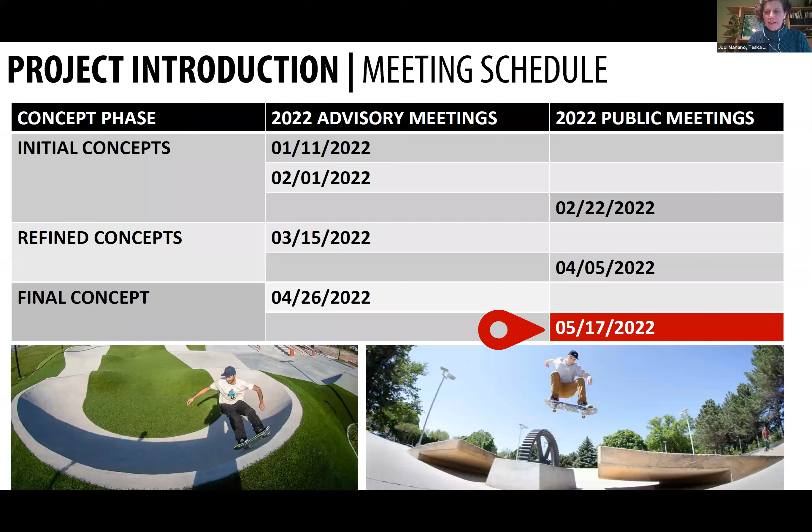So we've had a variety of meetings. We've met with the advisory group 4 times, and we've met with the public 3 times just as part of this phase. So here we are with our final concept plan at public meeting number 5.

For those that aren't familiar, the goals set forth by City Council for this project are to construct an in-ground custom concrete skate park. It's located at the eastern end of Twiggs Park, and we'll show you some maps about the location. In addition to the skate park, there would be some additional park features that came out of the engagement process. We heard a lot of information.

We know that we are looking at other things like shade structure, site furniture, lighting, portable toilets, drinking fountain. There obviously needs to be a drainage system so the skate park is skatable shortly after it rains, pathways, signage, and landscaping. There are some existing park features at Twiggs Park today, things like pathways and lighting, and those would need to be modified slightly to accommodate the new skate park.

There is an unstable and eroded embankment that runs along the North Shore Channel along the north side of the park, and that is something that will also be addressed as part of this project. There is also a goal to plan for a future restroom facility.

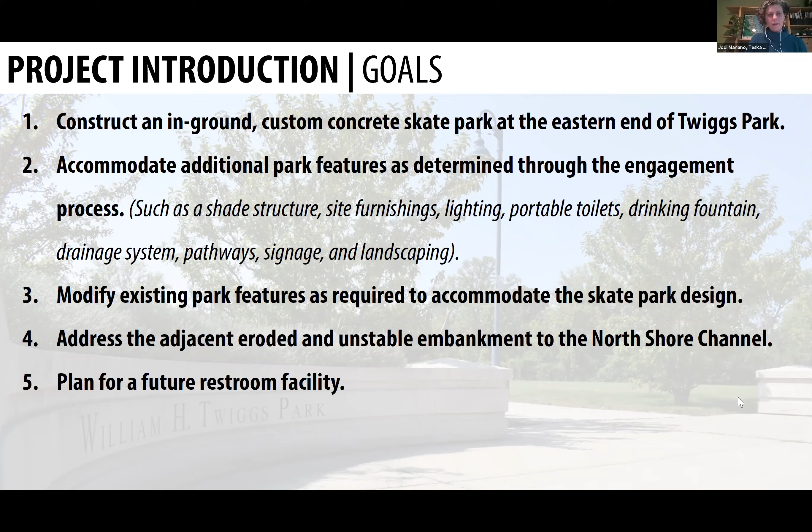So our project site is here. We are at Twiggs Park. The North Shore Channel is running along the north side of this park here, and Green Bay Road is running along here. Twiggs Park is one of many parks that's sort of this chain of green spaces that follows the North Shore Channel. It has a continuous bike path that runs through.

We also have bike facilities at the Ladd Arboretum on the other side of the channel, and we have on-street bikeways at Noyes and Ashland. So it's a great location for a park. This came out of the earlier public process, but it's visible, it's accessible, and it's part of an active series of green spaces. The proposed skate park is up here in this magenta color, located at the northeast portion of Twiggs Park.

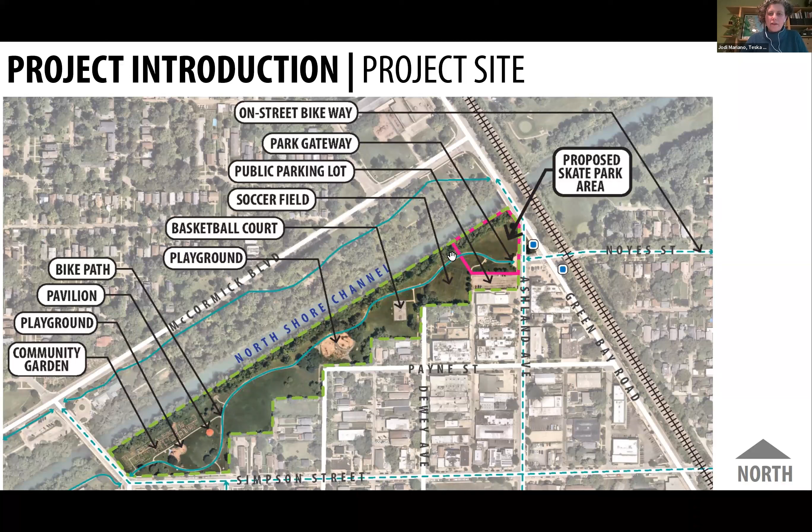Looking closer in, here again is Green Bay Road, Ashland Avenue is here, and we're looking roughly at this area within magenta. The embankment that I mentioned earlier that's in rough shape along the North Shore Channel is sloping down here - it's all of this vegetation here. As I mentioned, it's in rough shape, kind of falling apart in some places.

We've got invasive species to address, so that is something that we're looking at as part of this project. We have a very large water line that runs through here - this double dash line represents generally where the Northwest Water Commission easement is, and we can't touch anything within that zone. We are working within this orange shape here for the skate park.

We have a Gateway Plaza, that's kind of our entry, similar to the other entry plazas we see around town at the park areas. We've got our bike path through here, soccer field would stay, and then we've got a small pathway with lighting and bike racks. Things within this area would need to be modified to accommodate the skate park.

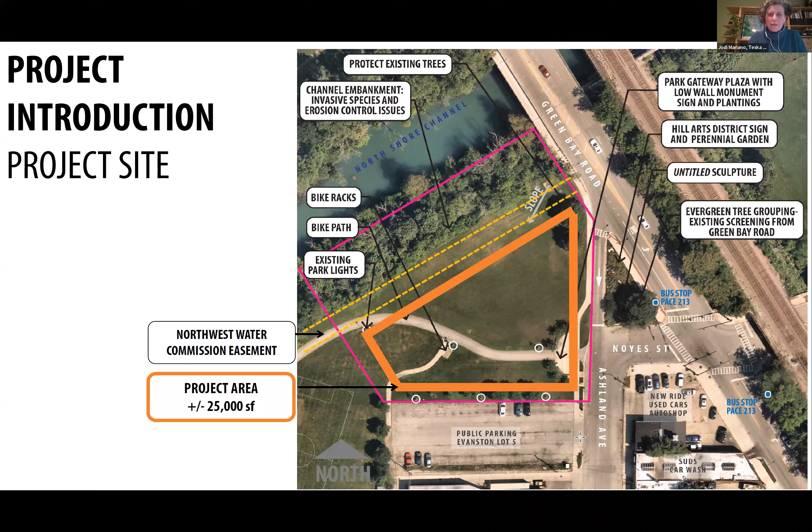So what we heard during the last public meeting in April - we asked folks to rank some of their preferences when we were looking at 2 different concepts. Overwhelmingly, I would say throughout most of the project and the public meetings, the public voted very similarly to the way the advisory group voted on things, so we had a lot of continuity that way.

Folks looked at 2 different bowl concepts: one that was an integrated bowl, kind of a closed bowl with a bonus area at the north, and one that was more of an open bowl with some features that got you into a shallow section at the south. We had overwhelming preference for C1, the closed bowl, and that's what you'll see this evening - Vince will walk us through it.

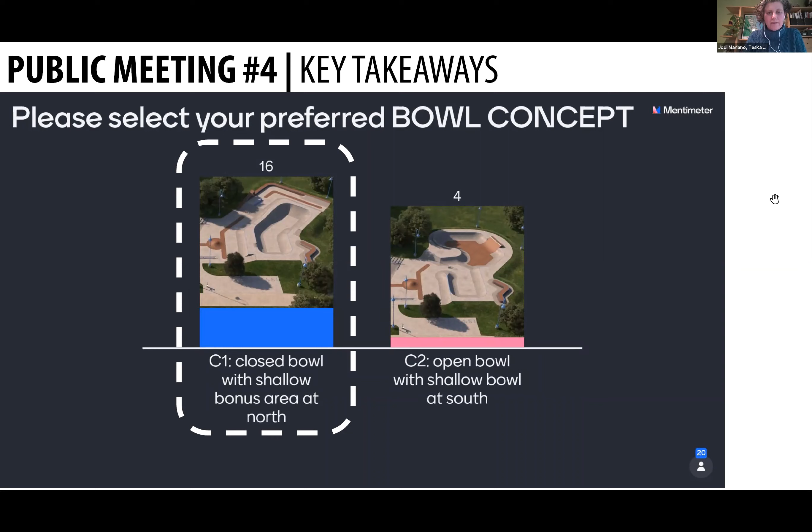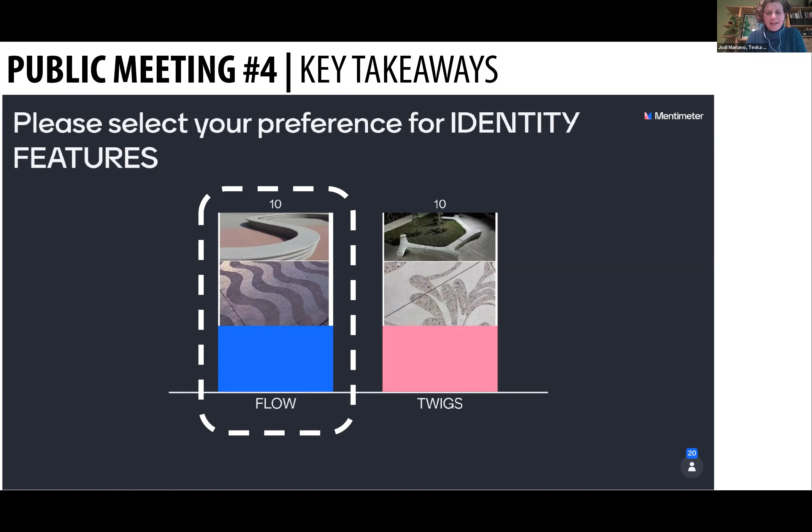We asked folks to rank two different identity features, one that represented flow and one that represented twigs, and we were at a tie. Similarly, the advisory group was at a tie on these things. So we are recommending the flow concept to move forward this evening, and we'll show you more about that.

We asked about preferences for color palette, looking at the existing Hill Arts District banners for inspiration. We heard more support for the orange with blue accents. The orange would be an integrated concrete skate color in the surface, and the blue would be our accent color, used as the steel edging you'd see on things like the bowls and other skatable features.

One of the things we talked a lot about at the last public meeting is how this park is going to operate: what the lighting will do and when the park will be open. After some internal discussion, staff decided the park hours will extend from 8 o'clock in the morning until 9 o'clock in the evening. The lighting will be similar in appearance to the security lighting out there today. As part of our construction documents, we'll run photometrics and locate specific positions for each light pole to make sure we don't have dark spots and have good security lighting. The anticipation is that the park would be closed at 9 o'clock.

Some other things we heard: a request to widen the sidewalk along Green Bay Road, which is a really good comment considering we have a bike path along Ladd Arboretum, so that's something we've incorporated into the design. We also heard about cultural identity features, in addition to a plaque recognizing William H. Twiggs, to also consider other local skaters and historical folks who helped start the skating revolution in Evanston. That's something we heard a little bit about.

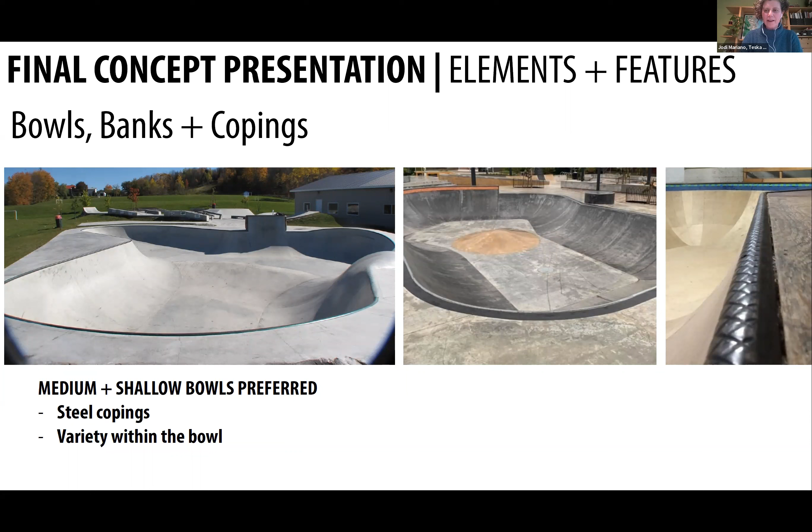Some imagery, which most of you have probably seen before at our previous meetings: our bowls will have a medium and a shallow section, as requested earlier on. They'll have steel coping like you see on the right. We'll have low and wide ledges with a grind ledge and a mani pad, and a variety of rails that Vince will talk through.

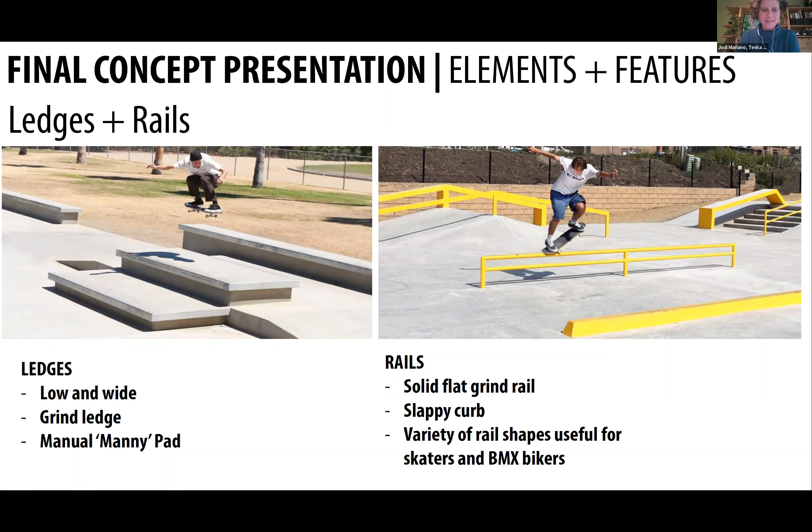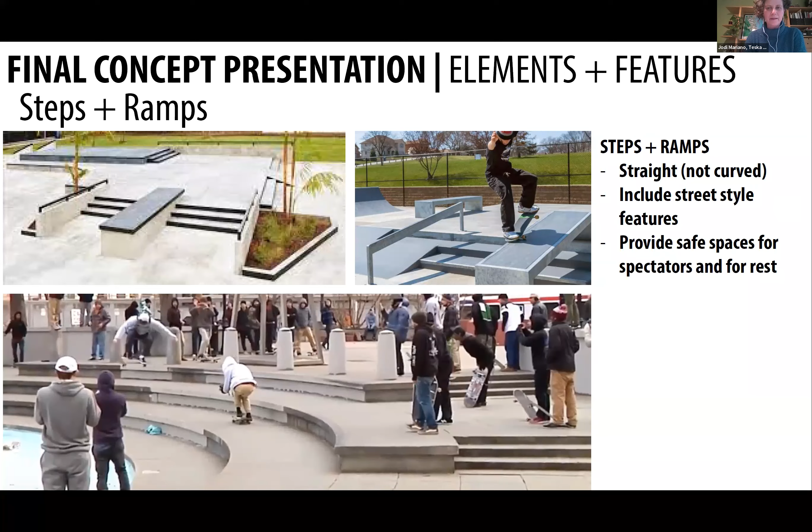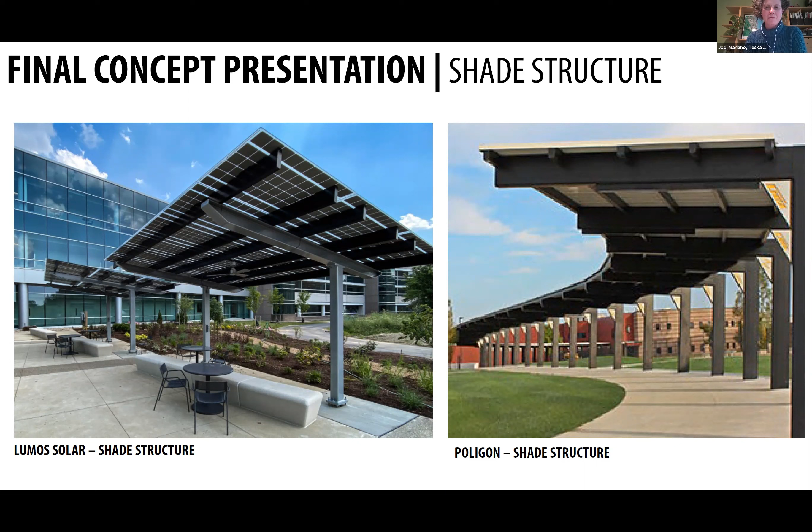Wedges and ramps, an A-frame will be included. For shade structures, we talked about solar shade structures as well as cantilevered shade structures without the solar component. So we know there will be a shade structure out there. We're looking at both options depending on how our budget works out. The solar shade structure is, of course, more expensive, so we're keeping both as potential options.

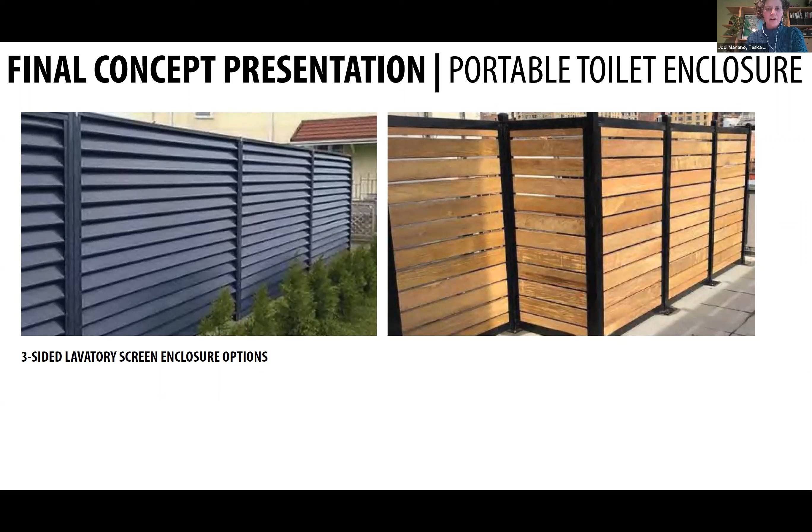There will be portable toilets as part of the initial skate park installation. The restroom facility would come at a much later date. But the portable toilets are kind of unsightly, and so there would be an enclosure that would basically look like a tall fence to wrap around 3 sides of the portable toilets.

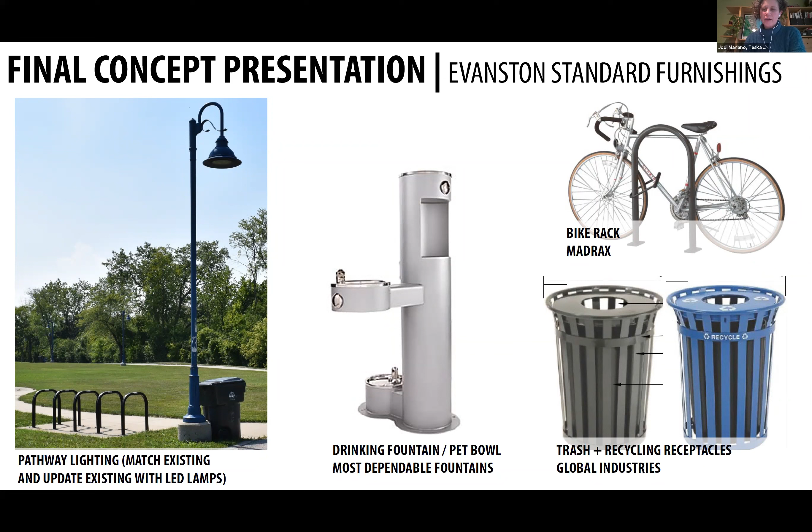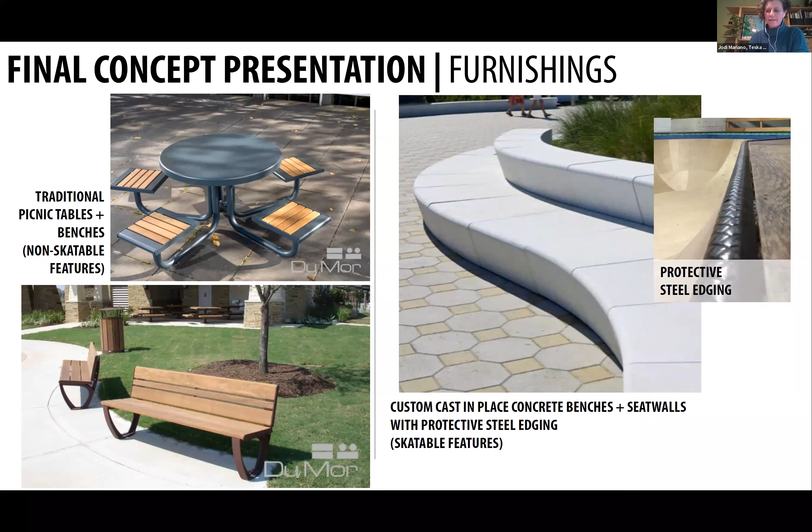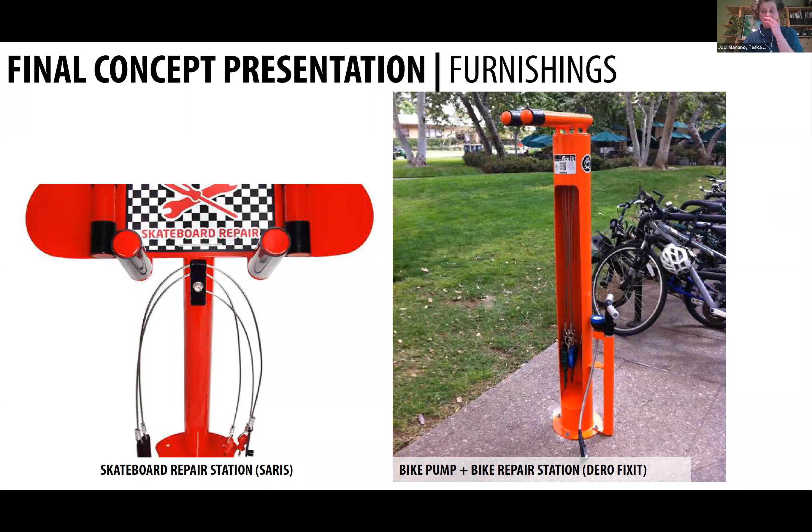We also heard about repair stations. So we're looking at a skateboard repair station shown here on the left. It's got tools to fix your skateboard. And also on the right, a bike pump and repair station, so we can do the same for repairing bicycles.

As far as color and character goes, the integrated concrete color is shown at the left. Again, we were looking at the orange with the blue accents. So the orange would be our integrated color in the surface, and the blue accent would be our steel coping.

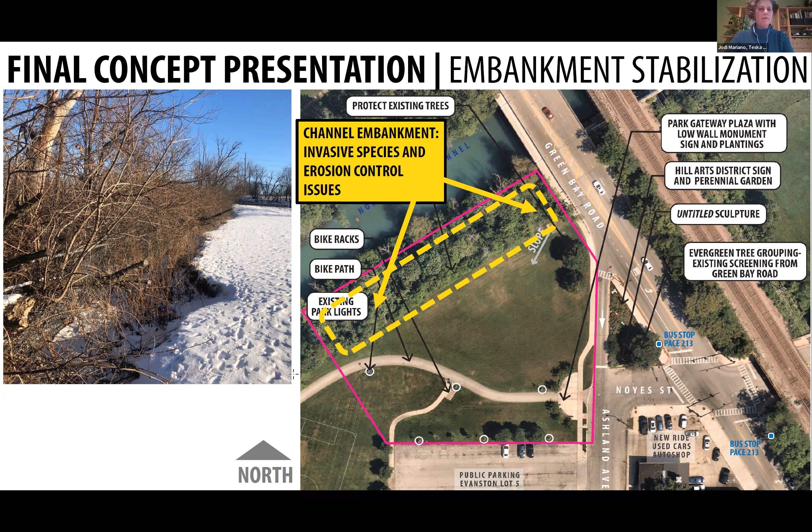I'll talk a little bit about the embankment and landscaping. Here's an image on the left of the embankment. As you can see, parts of the slope are starting to slump and scarp away. We've got a lot of invasives, trees that have fallen and broken the fence. So part of this project will be to clean up this whole area within our park site. Everything within the yellow dashed line would basically have invasives removed, good quality trees protected, the slope reconstructed, and then replanted with native flowering landscape materials. An image of what that could look like is here on the right. This is a project in Northlake, but this could be achieved with a very simple seed mix and good maintenance, to get us some flowering natives and a much more pleasant view from the skate park into the channel.

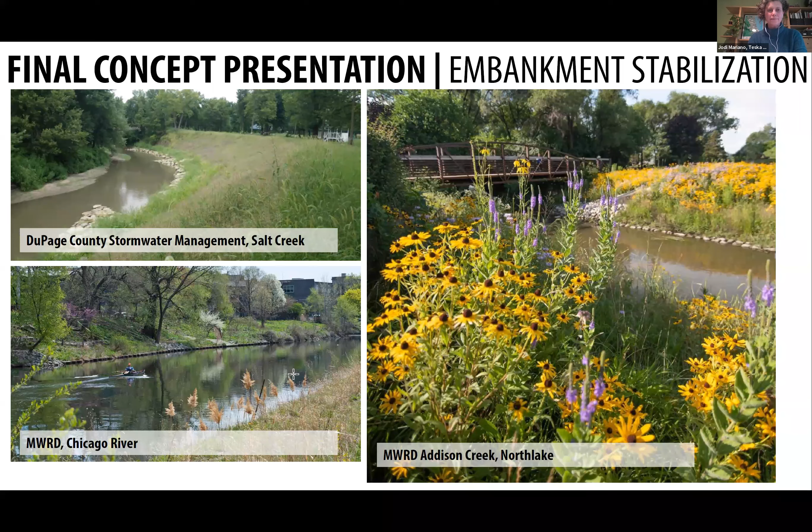We also will have landscape plantings surrounding the skate park. We heard a lot of comments about wanting more native plantings where we can, and doing our best to be sustainable. So we talked about the embankment plantings on the left, rain gardens at the top where the site and drainage patterns allow, depressions to support water-loving rain garden materials, and then also, adjacent to the pathways where we have space, native plantings that are generally low enough that they provide good views and clear spaces near the skate park, but a good way to replace lawn with something more native.

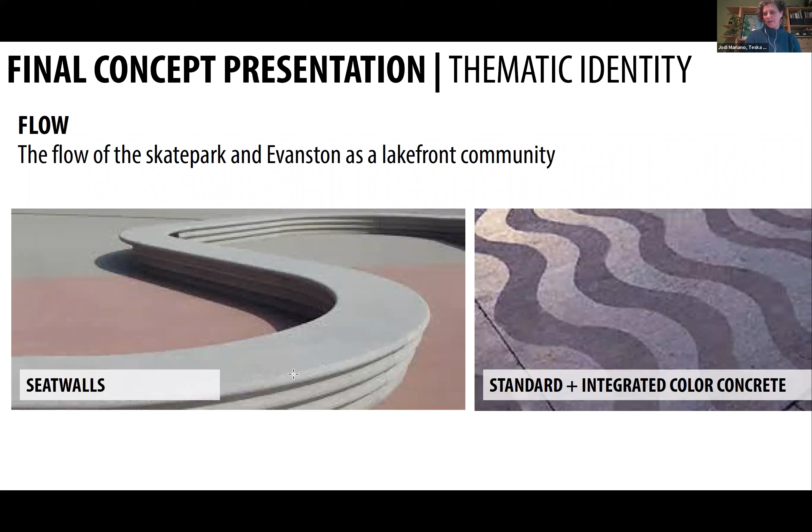Flow is the thematic identity that we are recommending as part of the final plan. Flow represents the flow of the skate park. Also, Evanston is a lakefront community. As mentioned earlier, water's flowing through the channel, so there's a flow all over the place. Seat walls could be curvilinear, like this here on the left, and also wavy patterns that show the integrated concrete color on the right.

We heard about cultural identity from folks in the neighborhood, and we were happy that people brought this to our attention. William Twiggs is the namesake for Twiggs Park, and he was a prominent African-American Evanstonian who was a local barber and printer, well published. He was publishing and distributing publications throughout Evanston and the nation, very involved with the city of Evanston. He had jobs at the city, and was also active in local churches and schools.

Okay, I am going to turn it over to Heather to walk you through the site layout, and then we'll delve into the skate park.

Heather: Here is our final site plan for the skate park. Jodi's talked about a lot of the elements, so this is how it all comes together. Moving from the East Plaza, that's the existing entry plaza of the park that is to remain. The bike path is reoriented to dip south, and it lines up with the existing entrance, which gives us plenty of space north of the bike path for the skate park. For some different amenities, we have bike racks, a drinking fountain, picnic tables, and repair station elements in this first entry area.

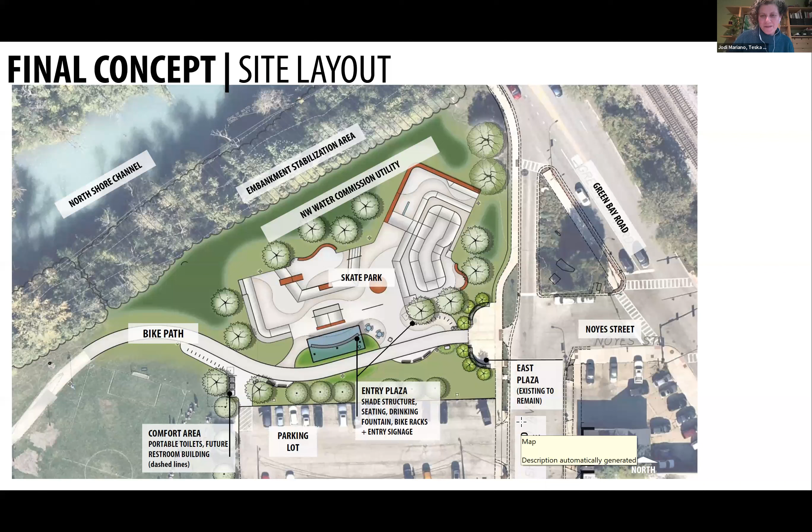Thank you. All right, let's get to the skate park. Vince: I'll just say it's looking really good. I've said this over and over again, but I love the entry area and how big and spacious it is. So really excited about that.

Here we have a high level overview of some of the criteria we looked at when designing the skate park. We went over this last time, so I won't go into too much detail, but we're looking at roughly 10,000 square feet. We want to create something that's not just a rectangle, a bit more of an interesting shape, both from an aesthetic and flow perspective. We're looking at a street to transition ratio of roughly 50-50. It's not an exact science, but I think we're pretty close.

We wanted a zone in the skate park geared towards beginner riders, who are sometimes left out of the skate park design equation, and I think we've achieved that here. For various reasons, including drainage, the skate park will have to be primarily above grade, so that's really just a grading and drainage note. On the right here, we have some key elements, some check boxes we were trying to check when creating the terrain, and I think we've checked all of these. So I think folks will be very happy with that.

This hasn't changed much since last time, but if you're new, we essentially have 4 zones to the skate park design. Zone 1 is our beginner area. Zone 2 is our intermediate street area. Zone 3 is what we're calling the intermediate to advanced bowl area section zone. And zone 4 kind of shaped up naturally, wasn't planned for.

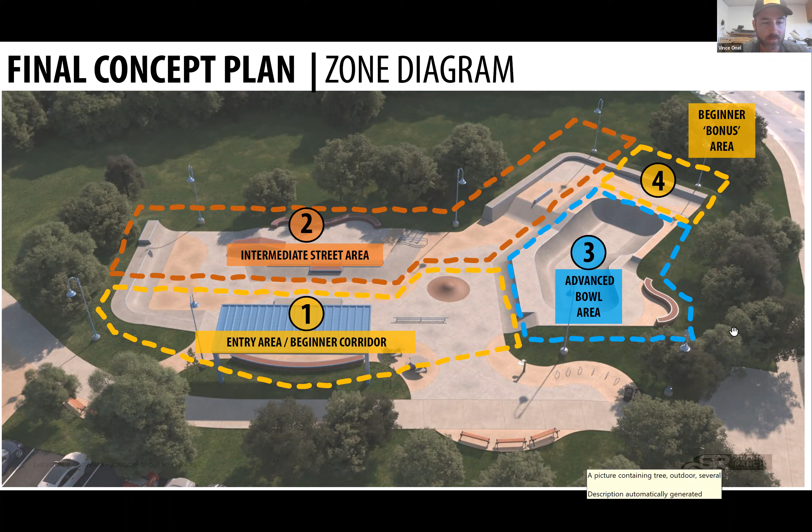While we're here, there was a question that came through the chat about the beginner zone—is there a micro mini ramp? I think in zone 4, yeah, there is a micro mini ramp. You want to explain that a little? Every feature in the skate park and skateboarding world can be called like 20 different things, so when you say micro mini, yeah, it's a mini half pipe, mini ramp. We do have that, which is in zone 4 at the top right there.

Thank you. All right, so this is the final concept that we're very excited about. Do you want to go back one? To the label one? Yeah.

It hasn't changed too much since we last showed it to you guys, but if you're new, we've got a quarter pipe on the west end, which leads into a number of different street elements in the center. Then we step up to an elevated section that has our bowl, which has a 4-foot section and then a 6-foot section. That's the 6-foot section, and at the bottom is the 4-foot section. So it's a 4 to 6 bowl.

And as you can see, we've got a bunch of really nice spectator seating and seat wall all the way around the skate park. So it's going to be far more than just a skate park. It's a great site, and with the expansive entry plaza and ample spectator seating, it's really going to become a community space. This is going to be a space where even if you don't skate or ride a bike or scooter, you can come here and just hang out, watch, and enjoy the activity.

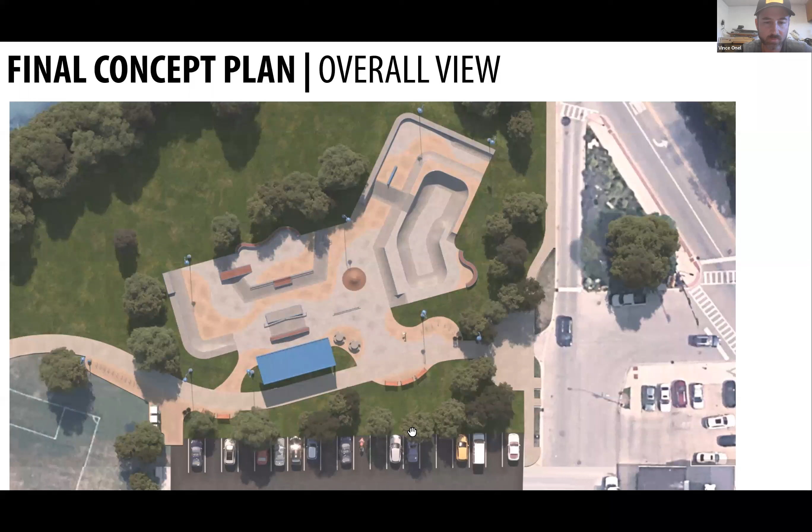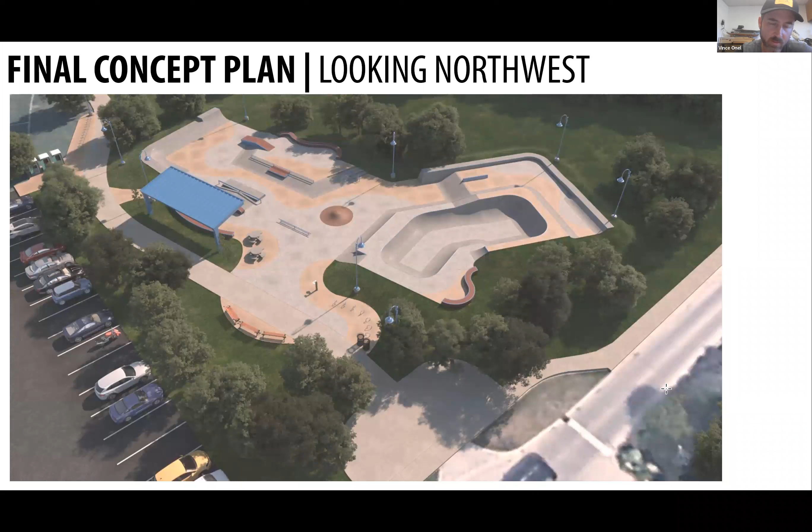Maybe Jodi, I want to highlight a couple other views. So this is a bird's eye plan view here. This is looking... west. Northwest, I labeled it for you. Oh, I can't read either. I can't read, nor do I know directions. I'm only good at designing skate parks.

Here you can see the spectator seating that we've added. We had heard some comments that some of the seating, while great, was a little too close to the action. So we've got some that's now separated a bit with a buffer zone. I think that's a nice addition.

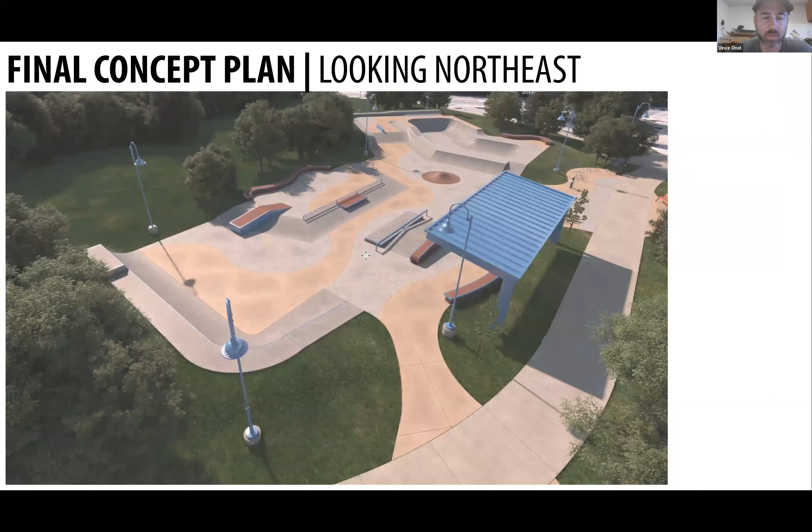Yeah, in the skate parks I go to on a weekly basis, I'm seeing more and more roller skaters and inline skaters, quad skaters. It's definitely increasing in popularity, which is really cool to see, and just shows how diverse modern skate parks are. So I think a quad skater wouldn't be prevented from using this facility. They could definitely use it, but as far as a dedicated area specific to quad skating, no, we weren't able to accommodate that.

Obviously, we have only 10,000 square feet to work with and a number of constraints, including a budgetary constraint. So we weren't able to do it all and have large expansive areas dedicated to things like quad skating. But I think it's a good thought for the future for other locations. I think Evanston is a large enough city with a large enough user base that they could accommodate more than just one skate park and future skateboarding and wheel sport spaces. So yeah, I think that's a comment for us to definitely record and for us to get with the city on for future planning.

Thanks. The next question is from Gabrielle Weiss. Is the platform wide enough between the deep end of the bowl and the mini ramp bonus spot for both to be used at the same time? Dueling rock to fakies?